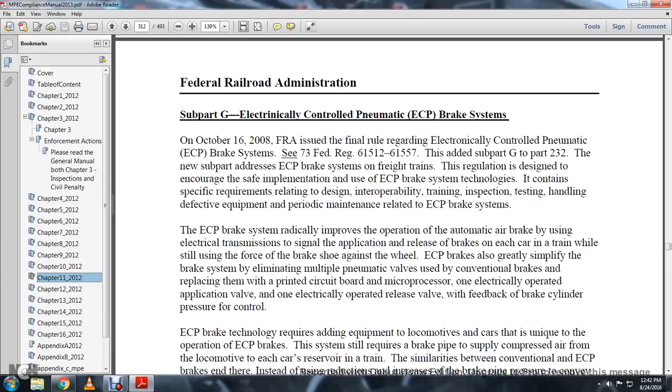It is added as subpart G of Part 232. The new electronically controlled pneumatic brake system regulation for freight trains is designed to encourage the safety and implementation of the use of ECP brake system technology. It contains specific requirements relating to design, interoperability, training, inspection, testing, handling defective equipment, and periodic maintenance related to electronically controlled pneumatic brake systems.

The electronically controlled pneumatic brake system radically improved the operation of the automatic air brake system, using electronic transmission signals for application and releasing the brakes on each car of the train, while still using the force of the brake shoe against the wheel. The electronically controlled pneumatic brakes also greatly simplified the braking system electronically.

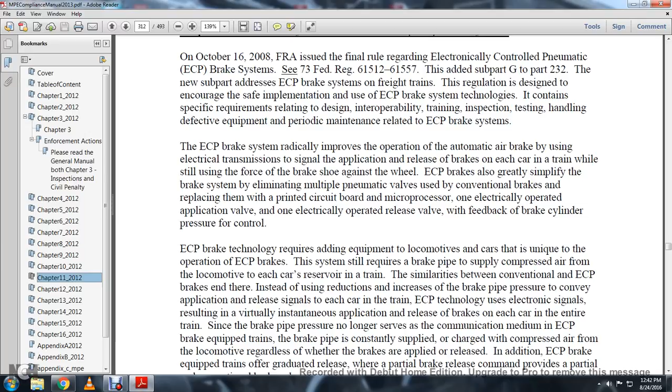Conventional brakes are replaced with a printed circuit board microprocessor, one electrically operated application valve, and an electrically operated release valve with feedback of the brake cylinder pressure for control. ECP brake system technology requires adding equipment to the locomotive and car that is unique to the operation of electronically controlled pneumatic brakes.

The system requires the brake pipe to supply compressed air for the locomotive to each car reservoir in the train. The similarities between conventional and electronically controlled pneumatic brakes end there. Instead of reduction or increase of brake pipe pressure to convey application and release signals to each car, the electronically controlled pneumatic technology uses electronic signals, resulting in virtually instantaneous application and release of the brakes on each car and the entire train.

Since the brake pipe pressure is no longer the medium of communication for end control in electronically controlled pneumatic brake equipped trains, the brake pipe is constantly supplied with charged compressed air from the locomotive, regardless of whether the brakes are applied or released.

In addition, trains equipped with electronically controlled pneumatic brakes offer graduated release, where a partial brake release command provides partial or proportional brake release.

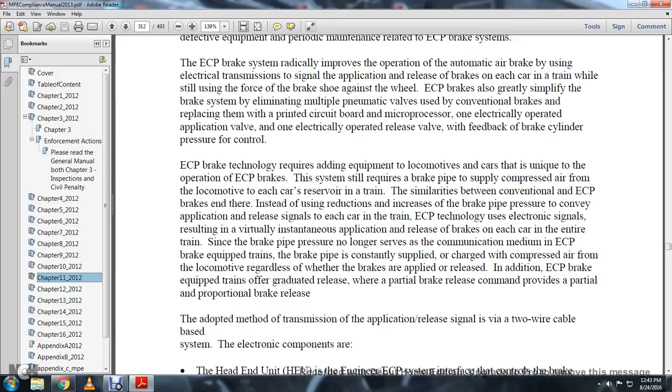The adopted transmission of the application/release signal is via a two-wire cable-based system. The electronic components include the head end unit, which interfaces with the electronically controlled pneumatic system to control the brake application and release, and they are on current electronic control pneumatic locomotives.

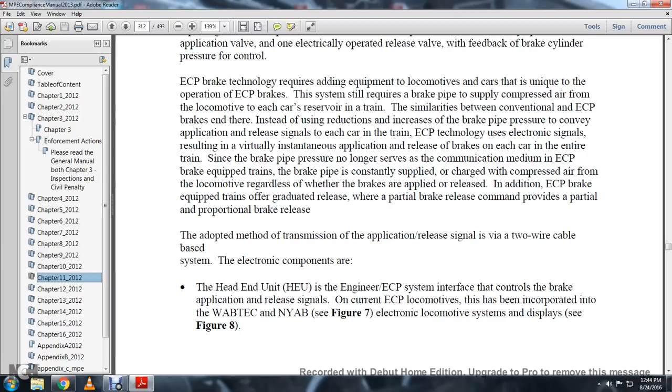This has been incorporated into the WABTEC and NYAB electronic locomotive systems and displays. See Figure 8. Figure 7 shows the New York air brake standalone head unit. This shows Figure 8, the integrated electronic control pneumatic brakes locomotive display.

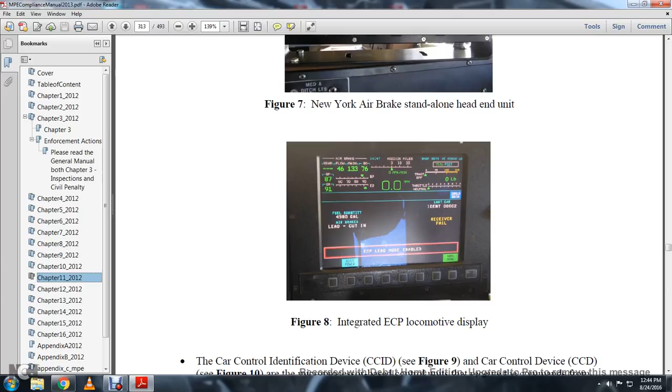The car control identification device, or CCID, and the car control device, CCD, is the microprocessor-based control unit that receives commands from the locomotive and sends status back to the locomotive. The car control device is an electronic device replacing the conventional pneumatic service and emergency portions during the electronic braking function.

The car control device technology interprets signals that the head end unit is sending, and sends warning signals to the locomotive in the event a component fails to appropriately respond to the brake command. Each car control identification device has a unique electronic address located in the car ID module, which is keyed to the car's reporting mark number, including the car configuration.

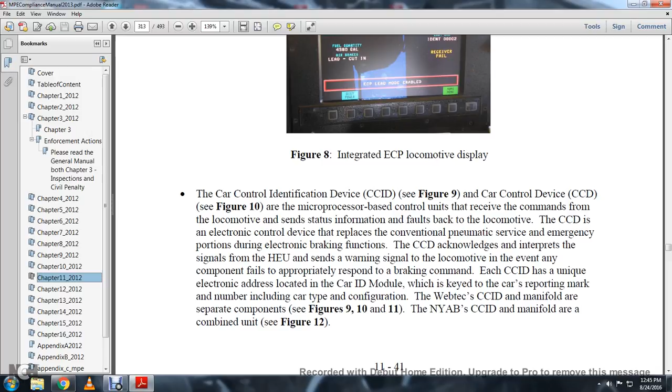WABTEC's car control identification and manifold are separate components, while the NYAB car control identification and manifold are a combined unit. See Figure 12. Figure 9 is a WABTEC car control identification device.

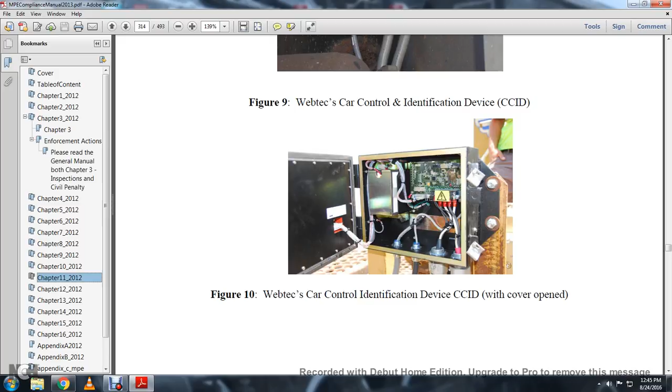Figure 10 is a WABTEC car control identification device. This is a WABTEC separate manifold. This is a New York air brake car control device manifold.

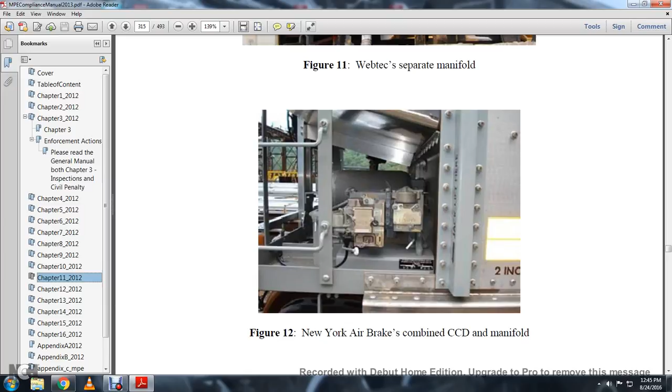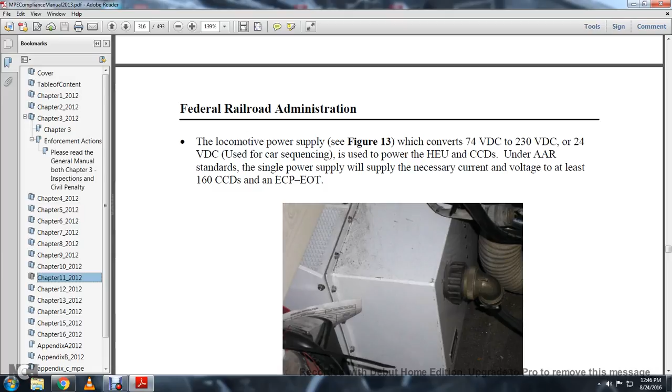Locomotive power, Figure 13, converts 74 volt DC to 230 volt direct current, and 24 volt direct current, used in car sequencing, and to power the head end unit and the car control devices. The AAR standard single power supply will supply the necessary current and voltage to at least 160 car control devices and an electronic control pneumatic end of train device.

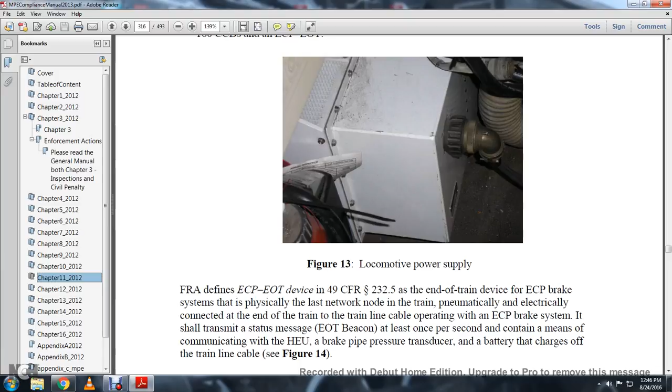At least once per second contains a means of communication with the head end of the train unit, the brake pipe pressure transducer, and battery charge off in the train line cable. See Figure 14, the end of train electronic control point of the end of the train.

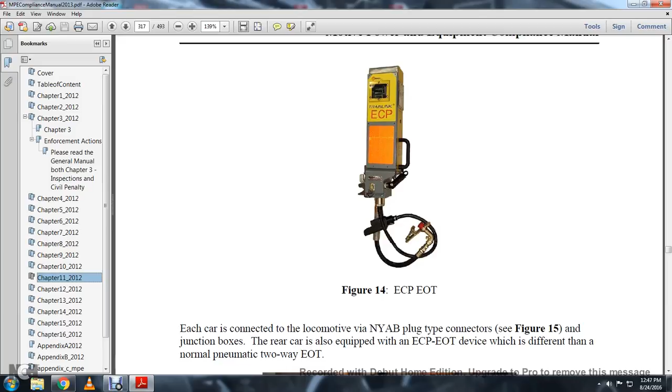Each car is connected to the locomotive, shown in the NYAB plug type in Figure 15. A junction box at the rear of the car is equipped with the electronic control pneumatic end of train device, which is different than a normal pneumatic two-way end of train device.

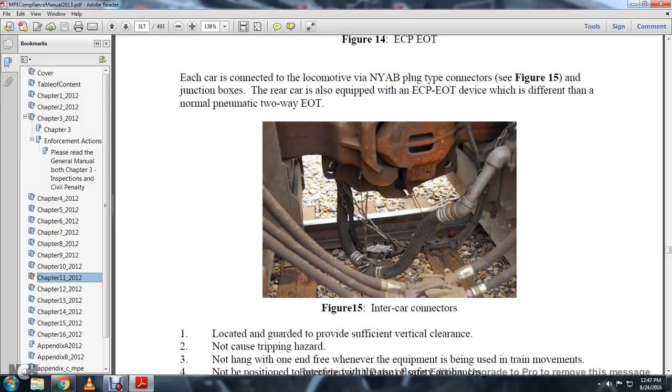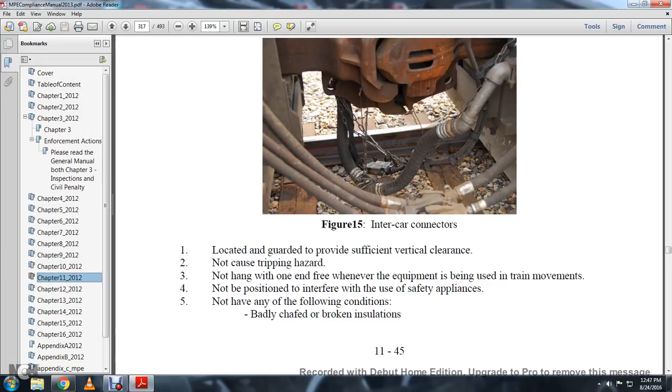Figure 15 shows the intercar connectors. These must be located to provide sufficient vertical clearance, not causing a tripping hazard, not hanging at one end when in use, not positioned to interfere with the use of safety appliances, and not having any of the following conditions: badly chafed or broken insulation, broken plugs, receptacles, terminals, or broken, protruding strands of wire.

Prior to October 16, 2008, the FRA granted a waiver, documented under FRA number 2006-26435, allowing BNSF Railway and Norfolk Southern Railway to install electronic control pneumatic brake systems on pilot trains to demonstrate the safety and efficiency of the technology in revenue service.

Under the waiver, trains equipped with the electronic control pneumatic brake system were allowed to travel up to 3,500 miles without undergoing certain routine brake inspections, more than double the distance currently allowed by federal regulation. Now the final rule has been issued, and the waivers are no longer in effect.

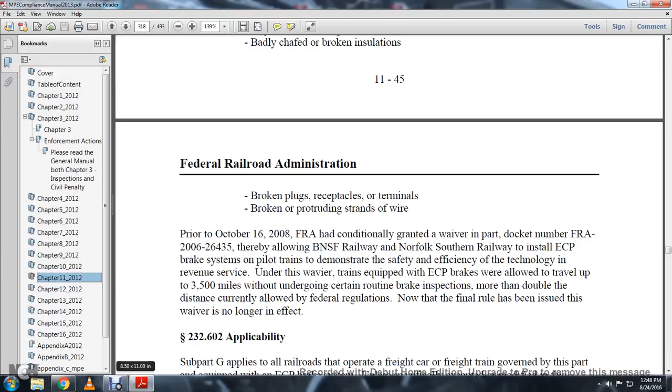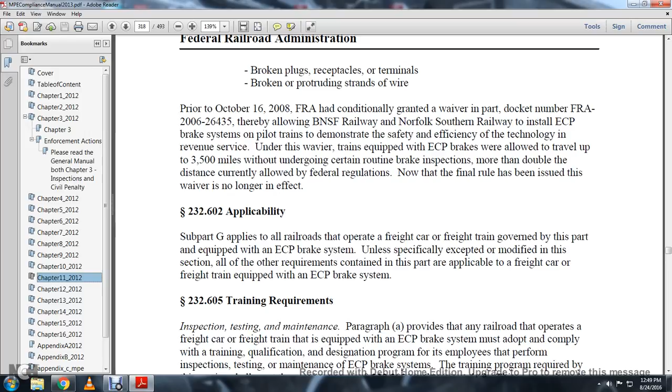232.602, Applicability. Subpart G applies to all railroads operating a freight car or freight train governed by this part that is equipped with an electronic control pneumatic brake system, unless specifically excepted or modified in this section. All other requirements contained in this part are applicable to freight cars and freight trains equipped with the electronic control pneumatic brake system.

So the rest of this covers the electronic control pneumatic brake system.

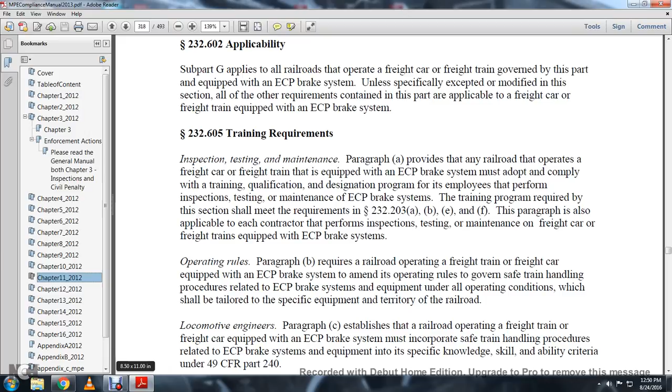232.605, Training requirements: inspection, testing, and maintenance. Paragraph A: a railroad that operates a freight car or freight train equipped with the electronic control pneumatic brake system must adopt and comply with a training and qualification program for employees who perform inspection, testing, and maintenance of the electronic control pneumatic system. The training program required in this section shall meet the requirements of 232.203 A, B, E, and F. This paragraph is also applicable to any contractor who performs inspection, testing, or maintenance of freight cars or freight trains equipped with the electronic control pneumatic brake system.

Operating rules. Paragraph B requires a railroad operating a freight train or freight car equipped with the electronic control pneumatic brake system to amend its operating rules governing safe train handling procedures with electronic control pneumatic brake system equipment under all operating conditions, tailored to the specific equipment and territory of the railroad.

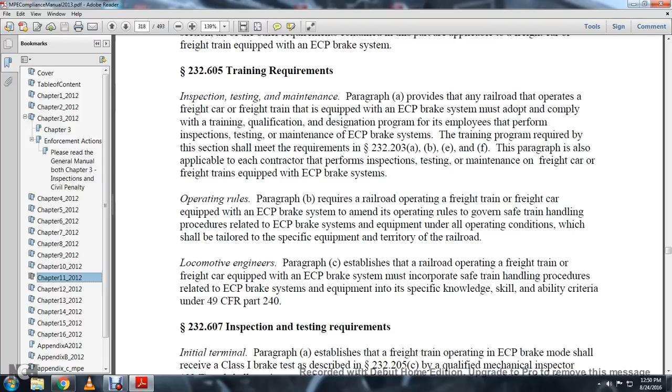Locomotive engineers. Paragraph C: a railroad operating freight trains and freight cars equipped with the electronic control pneumatic brake system must incorporate safe train handling procedures for electronic control pneumatic brake system equipment, including specific knowledge, skills, and ability criteria, under 49 CFR Part 240.

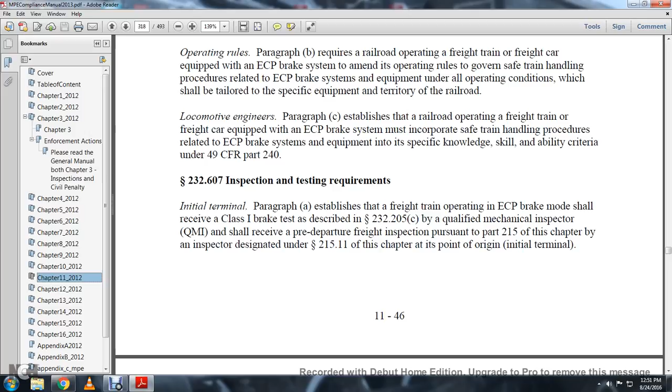232.607, Inspection and testing requirements. Initial terminal, Paragraph A: a freight train operating with electronic control pneumatic brakes should receive a Class I brake test as described in 232.205. The qualified mechanical inspector shall perform the pre-departure freight inspection pursuant to Part 215 of the chapter, by an inspector designated under 215.11 of the chapter, at the train's origin and initial terminal.

Trains en route. Paragraph B provides that, except for unit or cycle trains, a train operating in electronic control pneumatic brake mode shall not operate a distance exceeding 3,500 miles unless another inspection meeting the requirements of paragraph A of this section is performed. A unit cycle train operating in electronic control pneumatic brake mode should receive the inspection required in paragraph A of this section at least every 3,500 miles.

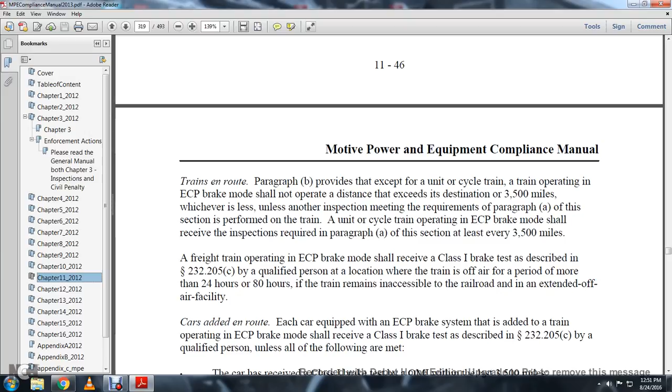A freight train operating in electronic control pneumatic brake mode should receive a Class I brake test as described in 232.205, performed by the qualified person, at a location where the train is off air for a period of more than 24 hours, or where the train remains inaccessible for the railroad to extend the off-air facility beyond that time.

Cars added en route, each equipped with the electronic control pneumatic brake system, added to a train operating in electronic control pneumatic brakes mode, should receive a Class 1 brake test as described in Statute 232-205, by a qualified person, unless all the following are met.

The car has received a Class 1 brake test by the qualified mechanical inspector within the last 3,500 miles. Information identified within Statute 232-205E relating to the performance previously received in Class 1 brake test is provided with the train crew. The car has not been off air for more than 24 hours.

A visual inspection of the car brake system is conducted to ensure the brake equipment is intact, properly placed, and secure. This may accomplish part of the inspection required under Statute 215.13 within this chapter. It may be conducted while the car is off air.

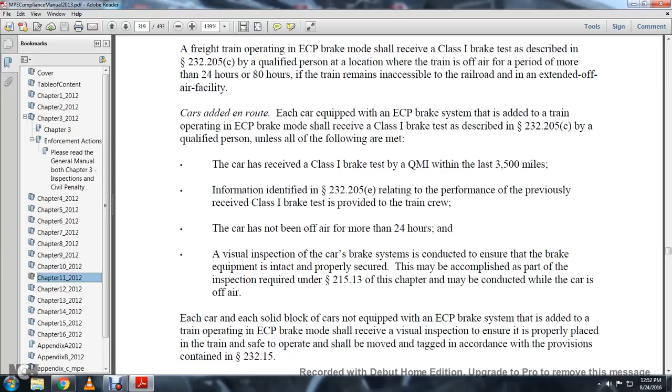Each car and each solid block car that cannot be equipped with the electronic control pneumatic brake system, when added to a train operating in electronic control pneumatic brake mode...

Class 3 brake test: a freight train operating with the electronic control pneumatic brake system mode shall receive a Class 3 brake test as described in Statute 232-211 B, C, and D.

When the configuration of the train is changed, including when the locomotive or the caboose is changed, when a car or solid block of cars is added to the train, or a car or solid block of cars is removed from the train, whenever the continuity of the brake pipe or electrical connections is broken, with the train consist otherwise remaining unchanged.

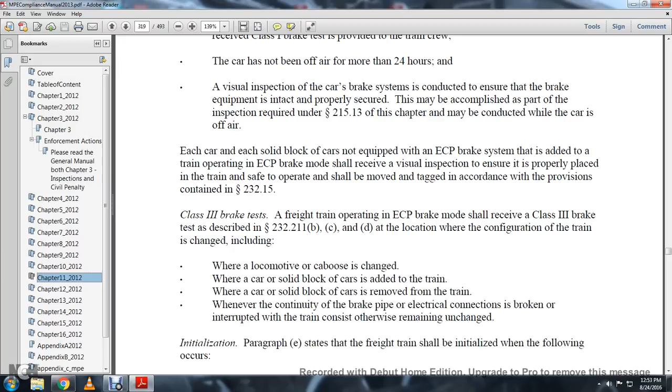Paragraph E on initialization states that the freight train should initialize when the following occurs: a Class 1 brake test, a Class 3 brake test, and when the electronic control pneumatic brake system is powered on.

The initialization process shall be maintained in accordance with the Association of American Railroads Standard S-4200, performed in sequential order for the vehicles of the freight cars of the train.

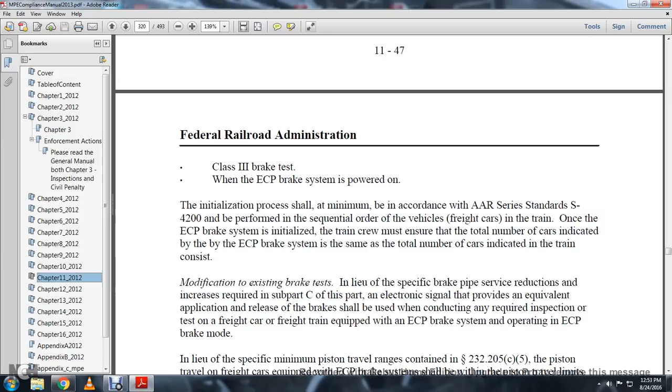Once the electronic control pneumatic brake system is initialized, the train crew must ensure that the total number of cars indicated by the electronic control pneumatic brake system is the same as the total number of cars indicated by the train consist.

For modification of existing brake tests, in lieu of the specific brake pipe reduction increase required in Subpart C, the electronic signals provided with the equivalent application and release of the brake shall be used in conducting any required inspection and testing of freight cars of a freight train equipped with the electronic control pneumatic brake system operating in electronic control pneumatic mode.

In lieu of the specific minimum requirements for travel ranges under Statute 232-205C5, the piston travel of freight cars equipped with electronic control pneumatic brakes will be within traveling limits stenciled, marked, or car-badged consistent with the manufacturer's recommended limits as stenciled and marked.

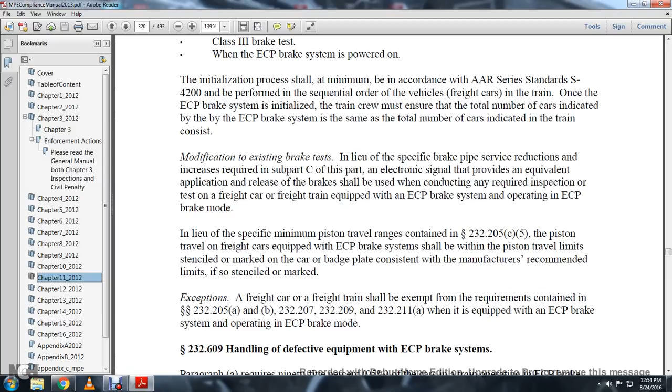Exemption: a freight car shall be exempt from the requirements contained in Statute 232-205A and B, and 232-207, 232-209, 232-211A, when it is equipped with the electronic control pneumatic brake system and operating in electronic control pneumatic brakes mode.

Statute 232-609 covers handling of equipment with the electronic control pneumatic brake. Paragraph A requires 95% of the cars in a train operating in electronic control pneumatic brake mode to be effective for operating brakes.

Prior to the departure of the train from the initial terminal location, a Class 1 brake test is required, performed on the entire train by a qualified mechanical inspector pursuant to Statute 232-607.

Paragraph B provides that a freight car equipped with the electronic control pneumatic brake system must have arrived with ineffective or inoperative brakes at the location or initial terminal where Class 1 brake tests are required, as stated in Statute 232-607B.

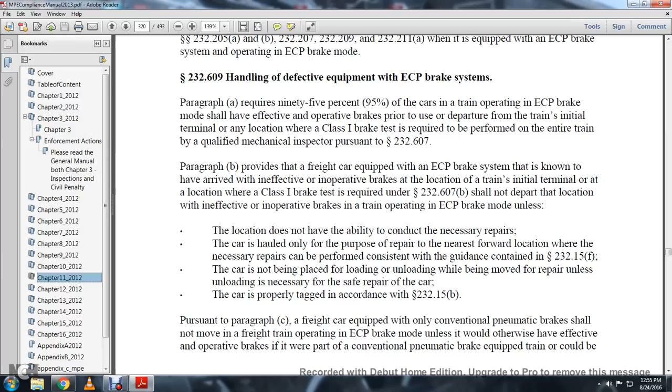If the location does not have the ability to conduct the necessary repairs to the car, it may be hauled, but only for the purpose of repair, to the nearest forward location where repair can be performed, consistent with the guidance contained in Statute 232-15F. The car shall not be placed in loading or unloading unless the unloading is necessary for the safe repair of the car.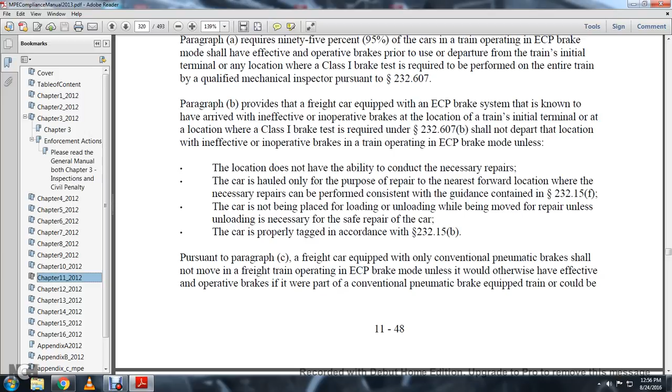or could have been moved from the location in defective condition under the provision of Statute 232-15, with the tag in accordance with 232-15B.

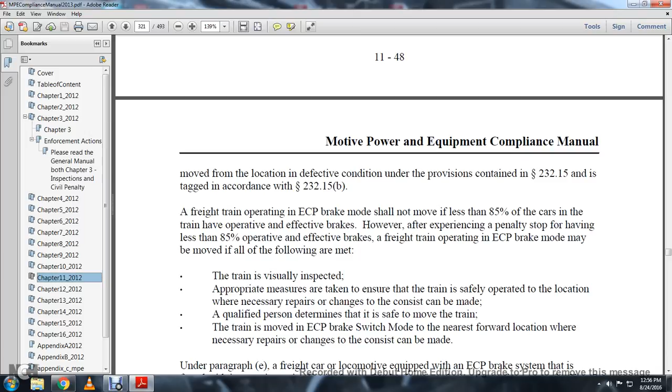A freight train operating in electronic control pneumatic brake mode shall not move with less than 85% of the cars in the train having operative effective brakes. However, after experiencing a penalty stop with less than 85% operative effective brakes, a freight train operating in electronic control pneumatic brake mode may be moved if the following are met.

The train is visually inspected. Appropriate measures are taken to ensure that the train is safely operated to the location where necessary repairs or changes can be made. A qualified person determines the safety of moving the train, and the train is moved within the electronic control pneumatic brake switch mode to the nearest forward location where the necessary repairs and changes can be made.

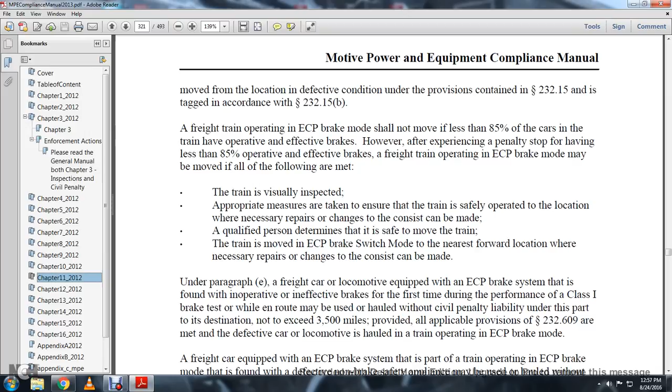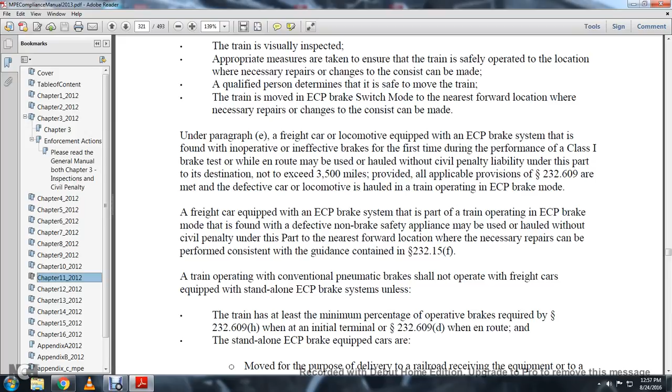The defective car and locomotive is hauled with the train operating in electronic control pneumatic brakes mode.

Freight equipped with the electronic control pneumatic brake system that is part of a train operating in electronic control pneumatic brakes mode, if found defective, non-brake safety appliance may be applied, may be used or hauled without a civil penalty, to the nearest forward location where the necessary repairs can be performed, consistent with the guidance contained in statute 232-15F.

A train operating with conventional pneumatic brakes should not operate with freight cars equipped with standalone electronic control pneumatic brake equipment unless the train has the least minimum percentage of operating brakes required under statute 232-609H when at an initial terminal, or 232-609D when en route.

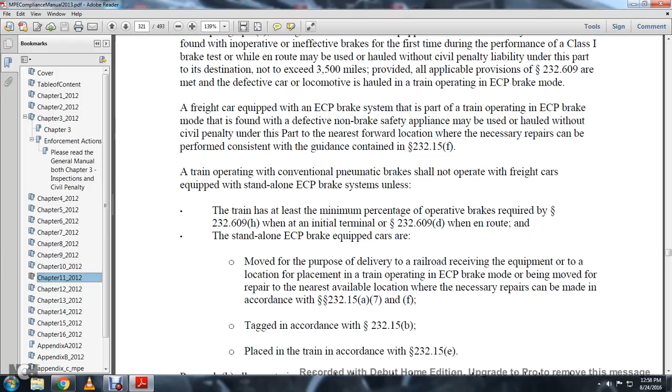The standalone electronic control pneumatic brake equipped cars are moved for the purpose of delivery to the railroad receiving the equipment, and to the location for placement in a train operating in electronic control pneumatic brake mode, moved to the nearest available repair location where necessary repairs can be made in accordance with statute 232-15A7 and F. Tagged in accordance with 232-15B, placed in the train in accordance with 232-15E.

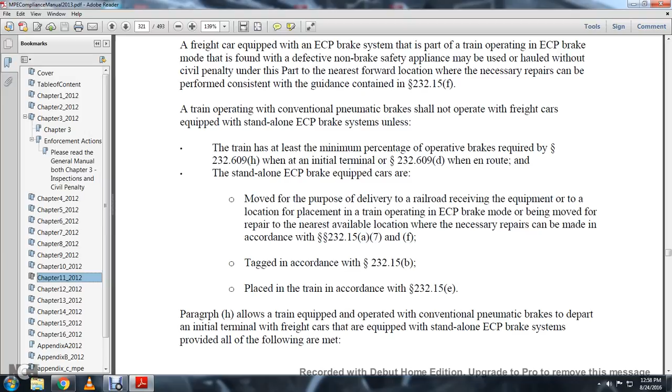Paragraph H allows the train, ordinarily operated with conventional pneumatic brakes, to depart the initial terminal with freight cars equipped with the standalone electronic control pneumatic brake system, provided the following are met.

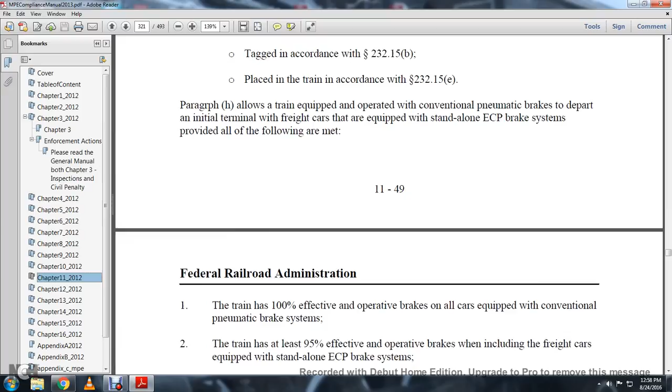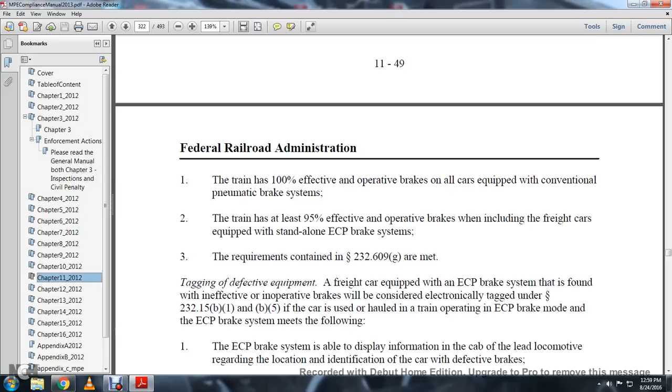1. The train has at least 100% operative brakes among those equipped with conventional pneumatic brakes. The train has at least 95% effective operative brakes including the freight cars equipped with the standalone electronic control pneumatic brake system. The requirements contained in paragraph 232-609G are met.

Tagging defective equipment: after a freight car equipped with the electronic control pneumatic brake system is found with ineffective and inoperative brakes, it will be considered electronically tagged under statute 232-15B1 and B5, and the car may be used and hauled in a train operating in electronic control pneumatic brake mode.

The electronic control pneumatic brake system meets the following: the electronic control pneumatic brake system is able to display information in the cab of the lead locomotive regarding the car's location and identification of the car with defective brakes. The information is stored, downloaded, secured and accessible to the FRA and operating or inspection personnel.

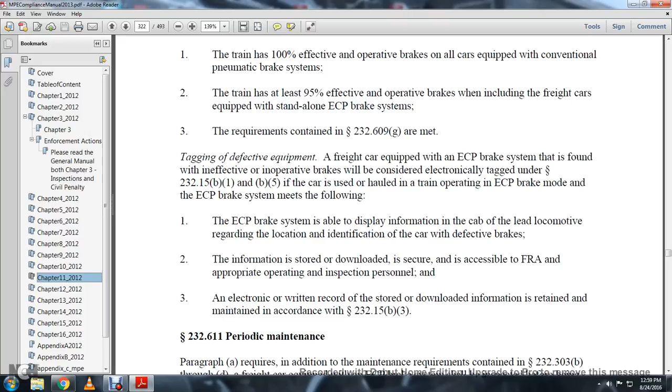3. An electronic written record of the stored and downloaded information shall be retained and maintained in accordance with statute 232-15B3.

232-611, periodic maintenance. Paragraph A requires additional maintenance requirements contained in statute 232-303B through D. A freight car equipped with the electronic control pneumatic brakes shall be inspected before being released from the shop or repair track to ensure the proper safe condition of the following.

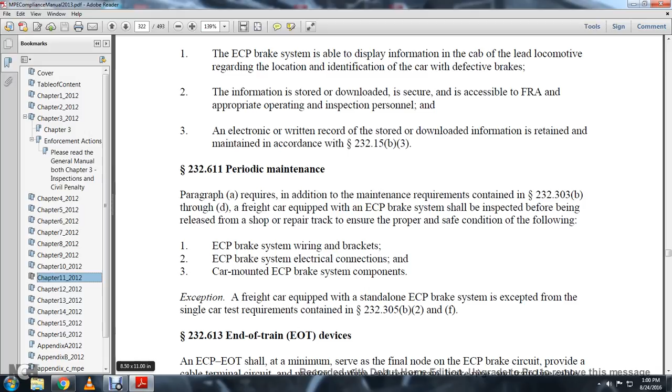1. The electronic control pneumatic brake system wiring brackets, electronic control pneumatic brake system electrical connections, and car-mounted electronic control pneumatic brake system components. Exception: a freight car equipped with the standalone electronic control pneumatic brake system is exempted from the single car testing requirements contained in statute 232-305B2 and F.

232-613, end of train devices. An electronic control pneumatic end of train device shall at a minimum serve as the final node on the electronic control and brake circuit provided with the electronic terminal circuit monitoring, confirming the status of the train brake pipe, the train line cable continuity, cable voltage, brake pipe pressure, the status of the end of train device, and battery charge.

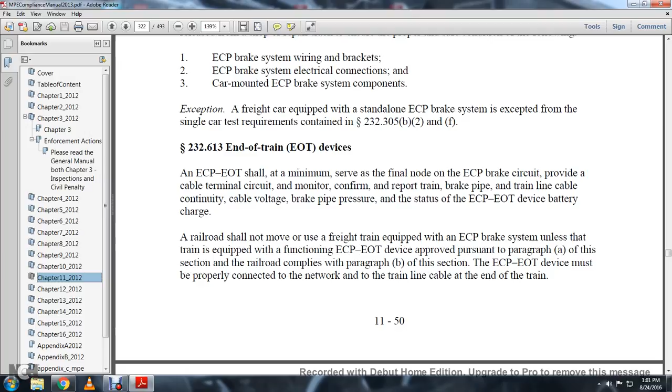Railroads shall not move a freight train equipped with an electronic control pneumatic brake system unless the train is equipped with a functional electronic control end of train device pursuant to paragraph A of this section, and the railroad complies with paragraph B of this section. The end of train device must be properly connected to the network and the train line cable at the end of the train.

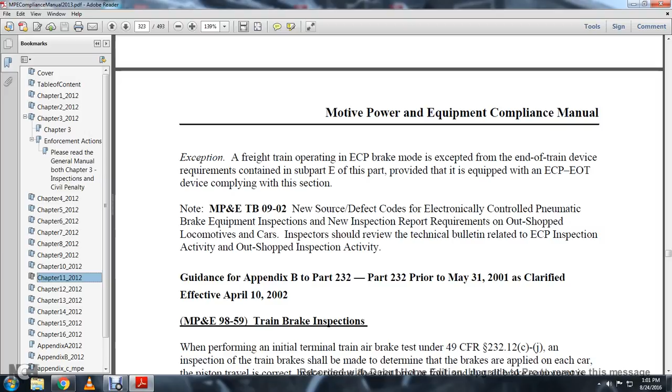Note the motive power and equipment technical bulletin 09-02, new source defect codes, electronic control pneumatic brake equipment inspection, new inspection report requirements on the out-shopped locomotives and cars. Inspectors should review the technical bulletin related to the electronic control pneumatic inspection activity, out-shopped inspection activity, guidance for Appendix B of Part 232, prior to May 31st 2001, clarified effective April 10th, 2002.

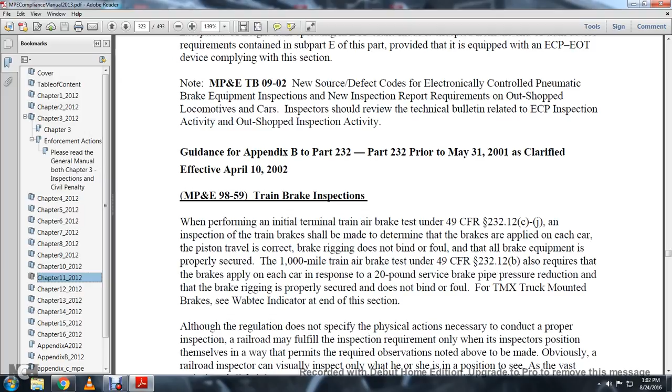Motive power and equipment 9859, train brake inspection. When performing initial terminal train air brake testing under Title 49, 232.12 C through J, inspection of train brakes should be made to determine the brakes applied on each of the cars, the piston travel is correct, brake rigging does not bind or foul, and that all the brake equipment is properly secured.

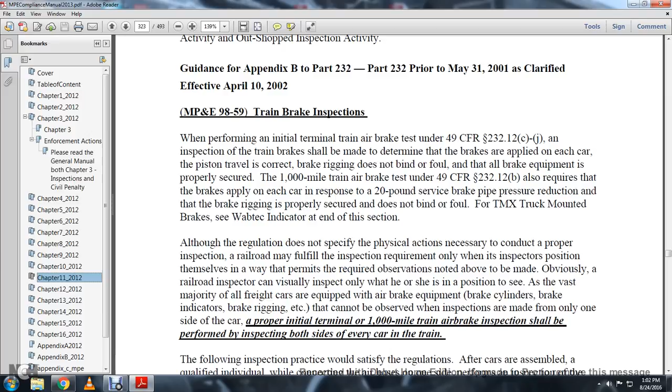The 1,000 mile train brake test under Title 49 CFR 232-12B also requires that the brakes apply on each of the cars responsive to a 20-pound service brake pipe reduction, that the brake rigging is properly secured and does not bind or foul, and the TMX truck mounted brakes of the Wabtec indicator at end of this section.

Although the regulation does not specify the physical action necessary to conduct the proper inspection, a railroad may fully fulfill the inspection requirements only if the inspector positions themselves in a way that permits the required observations noted above to be made. Obviously, the railroad inspector can visually inspect only what he or she is positioned to see.

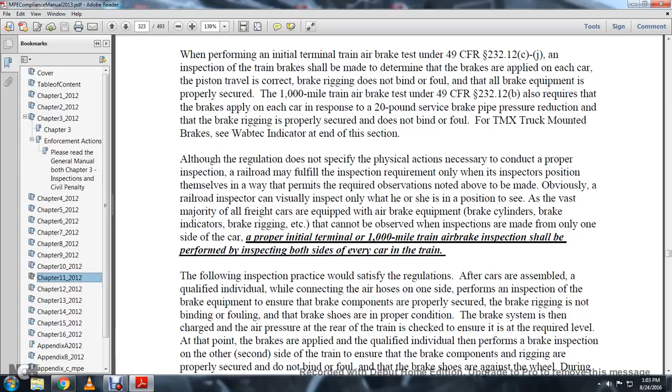As the vast majority of freight cars are equipped with air brake equipment, the brake cylinders, brake indicators, and brake rigging that cannot be observed when inspections are made only on one side of the car, properly performed initial terminal and 1,000 mile train air brake inspections shall be performed with inspection on both sides of every car on the train.

The following inspection practices would meet safety regulations: after the car is assembled, the qualified individual will connect the air hoses on one side and perform the inspection of the brake equipment to ensure the brake components are properly secured, the brake rigging is not binding or fouling, and the brake shoes are in proper condition.

The brake system is then charged with air pressure, and the rear of the train is checked to ensure the required level. At that point, the qualified individual will perform the brake inspection on the other, second side of the train to ensure the brake components and rigging are properly secured but do not bind or foul, and the brake shoes are against the wheel.

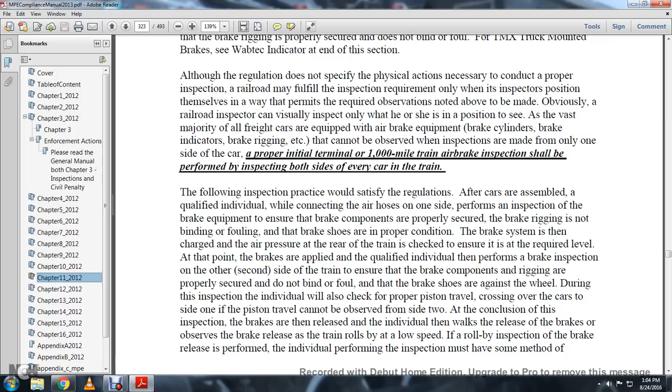During the inspection, individuals will also check the proper piston travel crossing over the cars, in case the piston travel cannot be observed from side 2. At the conclusion of the inspection, the brakes are then released. The individual walks off, the release of the brakes is observed, and the train rolls by at low speed. If a roll-by inspection of the brake release is performed, the individual performing the inspection must have some method of communication with the train crew.

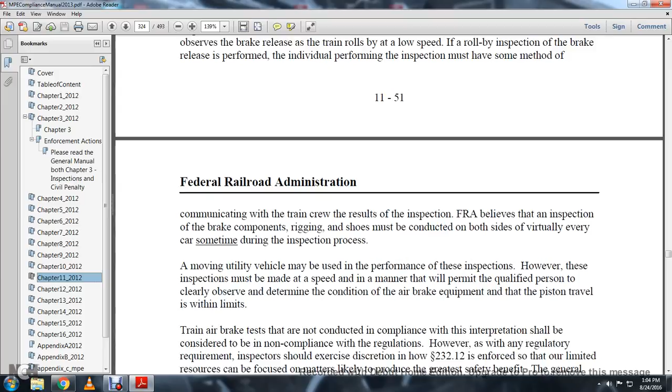As a result of this inspection, FRA believes the inspection of the brake components, rigging, and shoes must be conducted on both sides of virtually every car sometime during the inspection process. Moving utility vehicles may be used in these inspections; however, the inspection must be made at a speed and in a manner that will permit the qualified person to clearly observe and determine the condition of the air brake equipment and whether the piston travel is within limits.